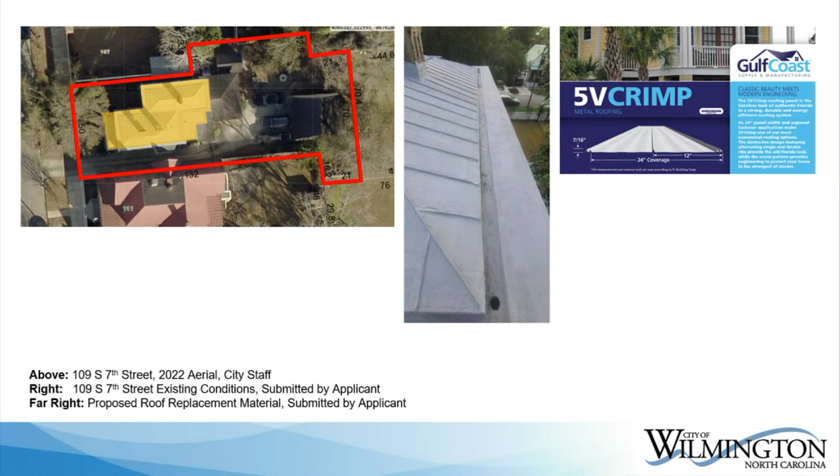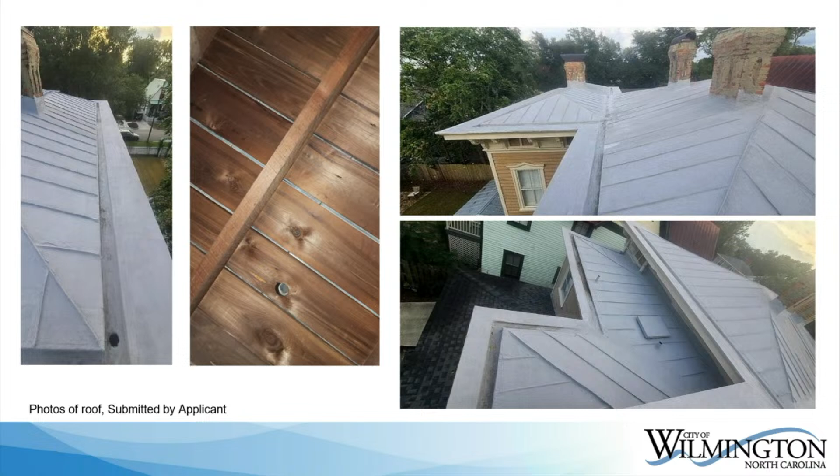The applicant provided additional information and photographic evidence per the commissioner's request after previous meetings, and these can be seen here. Staff would like to enter tonight's presentation and report into its proceedings.

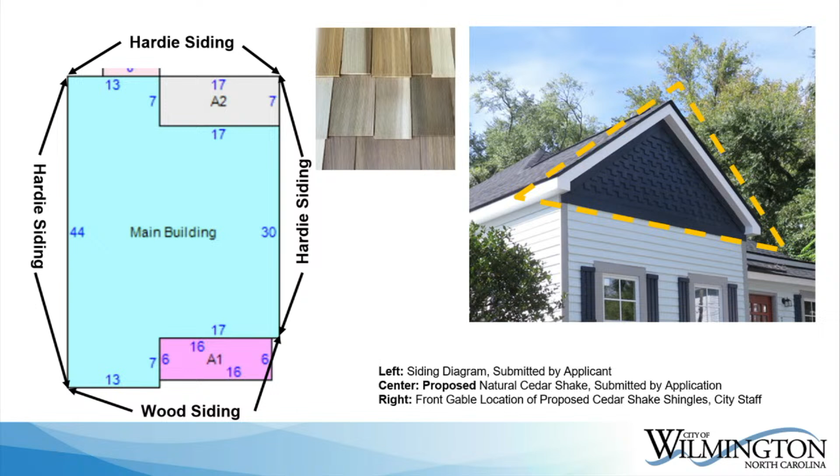Lastly, the applicant proposes to remove shingles from the front facade gable and install new cedar wood staggered butt shingles on the front facade gable end. The new shingles will not be painted or stained. The applicant also proposes to replace the front entry door and frame with Great Doors, knotty alder, unfinished, pre-hung single wood front door with a divided light and lower panel. Finally, the applicant proposes to repaint the house and front door with the colors shown here.

According to the National Park Service, installing vapor barriers like Tyvek would be considered an insensitive treatment of historic resources, and installation would require the removal of historic finishes that can be damaged in the process. Instead, they recommend that only if the walls are deteriorated or damaged to the point it requires complete replacement would it be appropriate to install a vapor barrier.

Staff notes that at the HPC meeting dated December 9th, 2021, the contractor and former owner of the home noted the current shingles on the gable and wood siding were revealed when vinyl siding was removed from the house. Staff also notes that the existing shutters were approved by a bypass application in 2022. The house is considered non-contributing to the district due to the lack of original integrity, as at the time of designation it was covered in vinyl siding.

Staff would like to enter tonight's report in its entirety to the proceedings. Are there any questions from the commission for staff?

Jessica, for some reason I'm pulling this item up on my iPad, and this agenda item keeps collapsing or disappearing, but I know enough about it having previewed this. Anyways, is there a proposal on this application for a new covering over the front door?

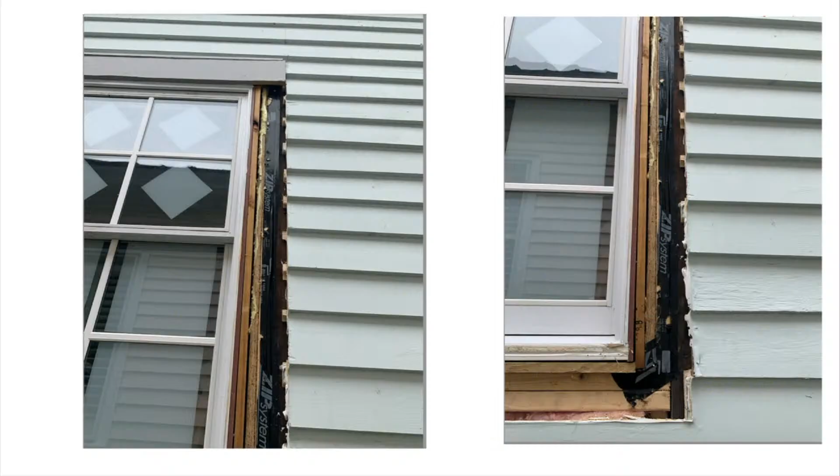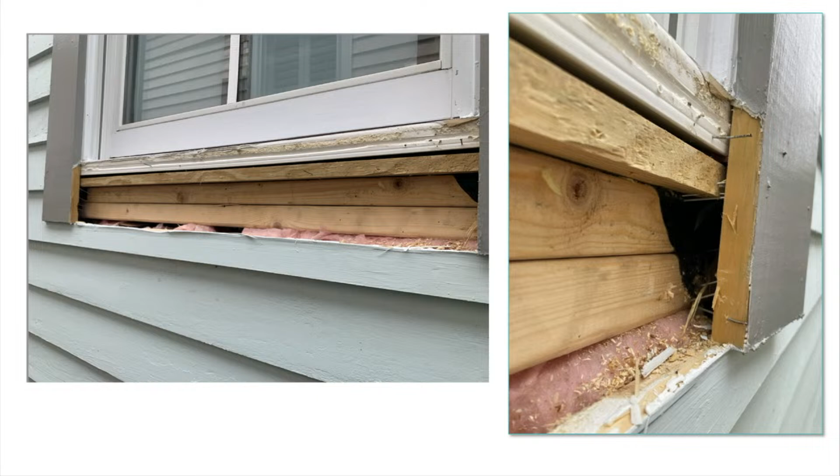Are you proposing a new construction window then? Yeah, unfortunately, just due to... do you have the picture of the one I sent you? Yeah, I've got them. Okay, see that when it was installed, it was about 2 to 3 inches in both directions smaller than the rough opening. So if we were to install a new window, we'd have to take out those shims. When you do a replacement window, you use the existing frame, and you're depending on the weatherproofing of the frame to the studs. That's not present here. And with those shims, we can't guarantee what their attachment is to the frames, so we wouldn't be able to guarantee the installation and achieve the DP value for the window.

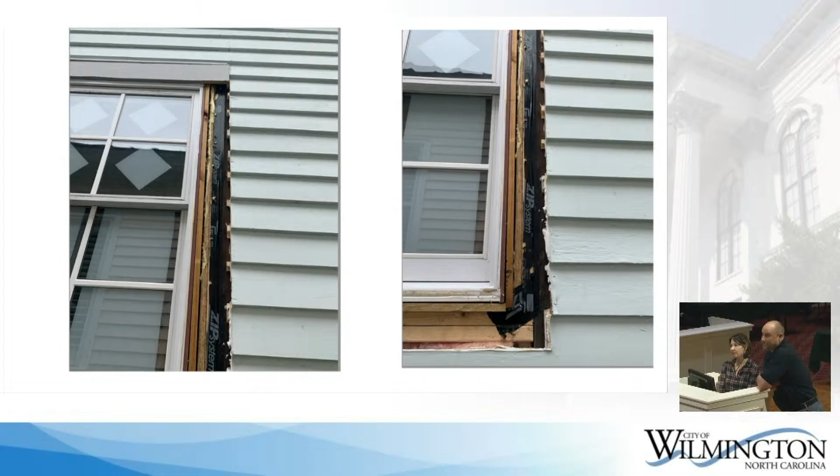Oh my gosh. Can you back up 2 photographs, please? So the shims, just so I can get myself oriented, on the photograph to the left, is that the shims that are at every lap in the siding? Maybe you haven't seen this. No, I've seen it in person. It's our exploratory surgery. We didn't want to tear everything off. So what the previous contractor did, there does appear to be some type of shim behind the existing siding, which looks like maybe they did that to bring it out to be more flush with the trim around the window. I'm not sure, but they did make some type of alteration to it.

After they removed that vinyl siding, I think it was keeping the water out for years and years. And when they took it off, there was more damage than they anticipated. I'm not sure what they did underneath it, but it looks like something was done to the siding. From what I understand, some was already removed and replaced.

We could switch PowerPoints, but if you look at the two pictures side by side of the home from before the owner sold it to me, you could see how much larger the windows were. There's a noticeable difference - probably at least 3 inches wider.

Well, when we asked that the wood windows be replaced, there was vinyl in between, so if you look at the picture - they did not put the right size wooden windows. They found the cheapest, fastest option, which is causing all of the mold problems - all of the problems - because they put in the wrong size wood windows and let you go with that.

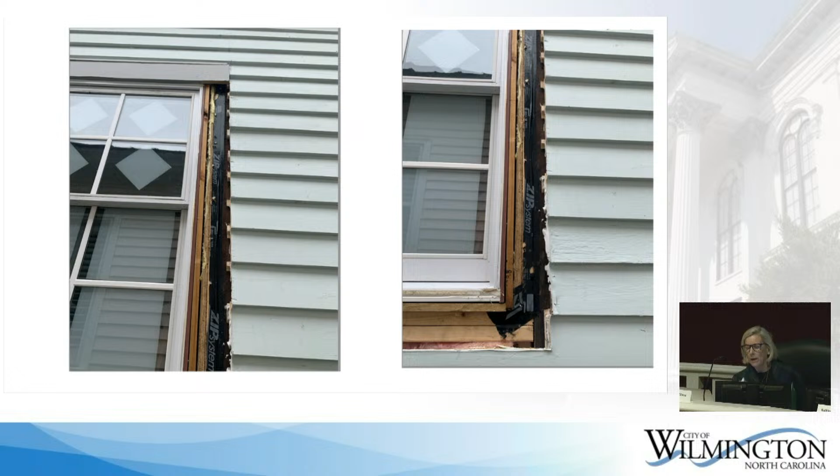And that's awful, and I'm sorry. That's a real estate deal gone bad. But they put this in there, and so now, Rudy, you gotta fix it - it messes up the heating and air and the mold and all of this.

And one of the advantages of doing this, Rudy, is a lot of the remediation can be done on the outside. Like you're saying, there's been a lot of air infiltration. I think Karina has reports of mold, and this will allow us to observe the wall cavities from the exterior and possibly treat it.

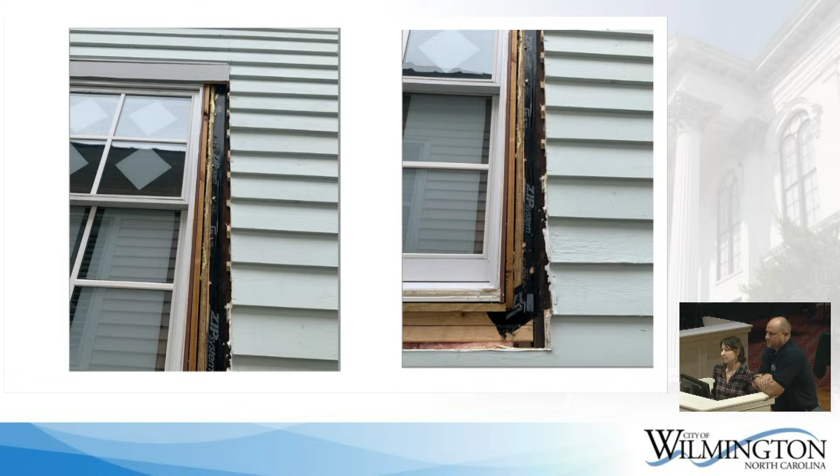I know that's not historical relevance - it's not, the Tyvek isn't the issue on an older home. It's the collateral damage done to remove the siding, remove all the trim features, put Tyvek over the sheathing. All new construction needs a water-resistant barrier, whether it's felt or Tyvek. But it's not that the Tyvek is the issue, it's just how to get that on there, how to deal with it, how to put it - all the damage is being done to take it off.

There's a lot of good siding on the house, and even the cedar that's being proposed to put back on is not gonna last as long as the siding that's already on the house as is. Now, those bottom pieces - I mentioned this a couple of months ago in that last meeting - you 100% have rot to repair. That has got to get done yesterday.

Again, the real issue though is securing my home so I don't have mold. But do you think that with fixing the window situation first - that has to be done first, and then we see what happens after that.

No, I would prefer, like I said, the 100% sure way, which is of course always the way I'd like to go, is to provide a surface to install the new windows to. So that would be the sheathing and the new vapor barrier, so we can continue the envelope throughout.

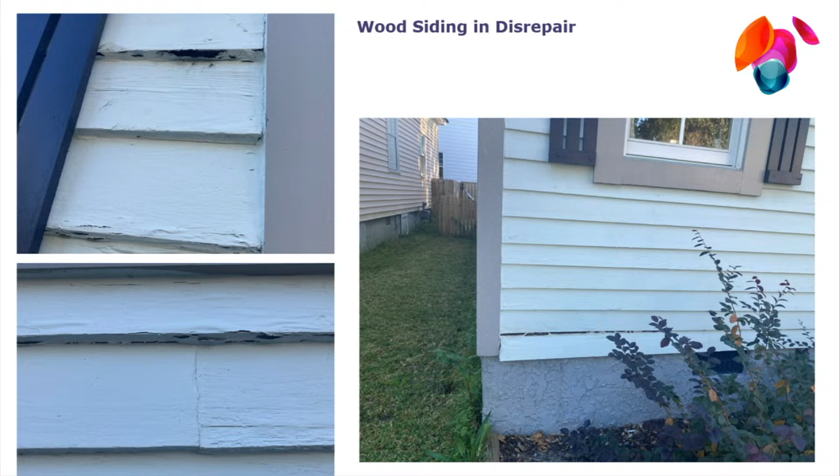So, like I said, it's to create a proper something to seal to is what we're looking for, so it would be a chicken and egg situation. And is there fiberglass insulation throughout the house?

Like there were some photographs? Yeah, fiberglass batts - bad insulation, yes. So it's not just where the windows were in those photographs, but the entire house has fiberglass insulation - well, we don't know what's in the walls. No, I'm pretty confident that from what we could see in the areas we took off, we could see pink fiberglass insulation, which is probably soaking up as much water as it can.

This was brought up a couple months ago too, the mold issue you're talking about. A huge candidate for that could be an oversized HVAC system, like if the house should have had 2.5 tons and it got 3.5 tons. After this, the HVAC whole entire system will be completely replaced, all of the tube things, the whole system, everything. From my understanding, it may be short cycling because it's too large for the house currently.

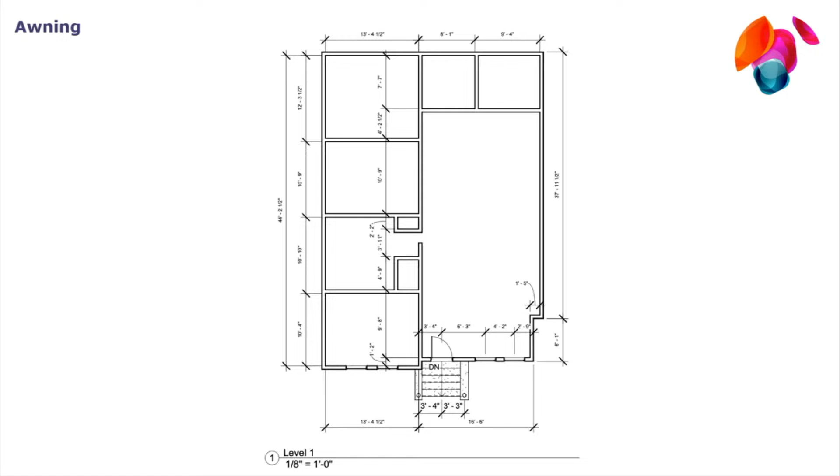I'm curious, is there a proposal for a little roof over the front door too? Yep, there is. So there's the door, and I'm proposing this awning - something that'll just nicely cover the front. The stairs will remain the same; we're not changing the brick stairs that have been there previously, in-kind wood. Well, those will probably not be in-kind, they'll have to be a little bit thicker. But the roof will be in kind with the roof we have today, elegant, simple.

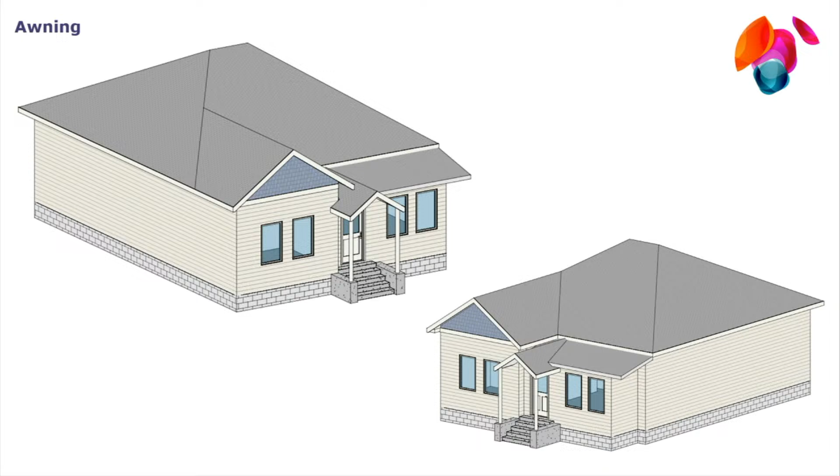I can show you other views. In the middle picture, right in the center of the house, is that a cricket we're looking at coming from the front face of the house, coming down to manage water that wants to fall down the plane of that gable toward the sidewall? Is that a cricket coming down? Are you talking about the hip that's coming down, dropping on the door? Which are you talking about? Yeah, right to the left, that triangle. Is that a hip? I think it's a valley that you have the overframe onto the main, and the valley dumps there. So when that water comes down where the cedar shake is, and comes down onto the new roof, what keeps the water from hitting the sidewall? I assume there's a cricket there, right?

I don't think she has a cricket drawn there, but you're right, it would need some type of cricket. That could be a cricket there that I'm looking at, but okay, I'm just curious about that.

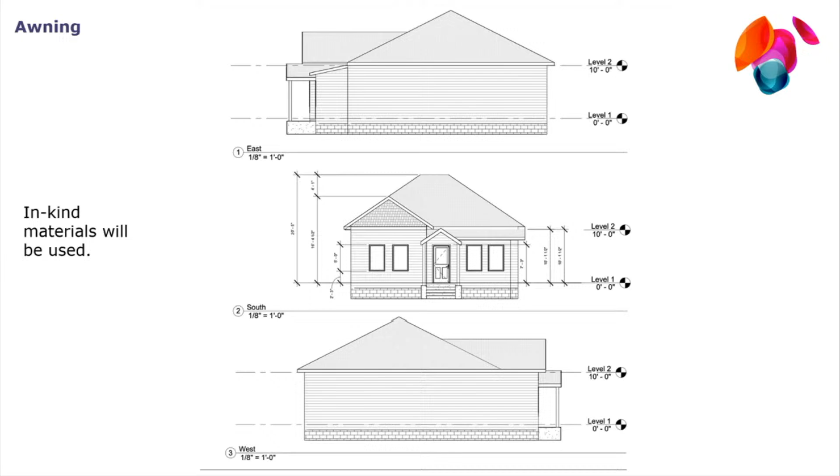So that's part of this proposal too - the window, the siding, and this feature right here, and also the shakes and the shutters. I just, they've been taken on and off about 5 times now, and they're falling apart. So same shutters, just going to paint them white to go with the new color scheme.

Staff would ask that we not vote on the awning piece that she's brought today. Staff has not reviewed it, and this is the first time we've seen it. I'm not comfortable with having something approved that we haven't even had a chance to properly review and let you know how it relates to standards. I think the other items are fine, but for me personally, that would make me feel more comfortable to understand all the parts before you guys approve that portion.

If we were to agree with that design in theory, is that something you would do at a bypass level, or would it need to come back? That is your call, but I would just prefer the opportunity to look at it and make sure I'm understanding what's going on before that. I'm not sure those images alone provide enough information. So if you wanted to set it up that way within the conditions, I think that's definitely an option. Yeah, that would be helpful.

And then the lighting I could do through bypass. You said the lighting? Yes, the lights - but when things are up, I could maybe decide differently. But are these the type of lights you would approve? Yes ma'am, but those are something we can discuss at a later date. We are here to talk about the siding and whether that is approvable, and I'd like to stay on that track.

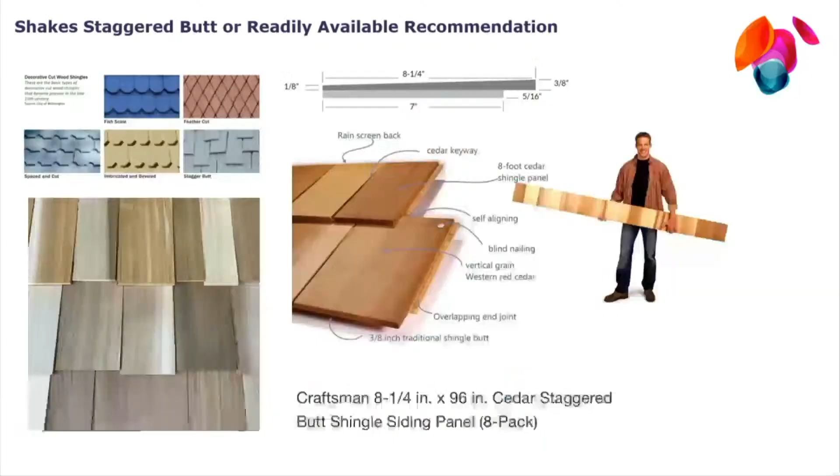Saying that the cedar shakes probably need to stay, because that's not insulating a heated space. And, as you can see, they use caulking absolutely everywhere on this house. I rewatched their HPC meeting, and they talked about caulking this - so that's all that's up there is caulking.

I just don't feel comfortable - they literally just caulked the holes from taking off the vinyl. I think one of the bigger factors is, there are certain builders that, if I follow after, I feel confident the field is closed and properly maintained. From what I've seen, I would think there are probably a million different Easter eggs out there that were not properly fixed. So it's our attempt to give her some reassurance that she's going to be in a safe home as far as mold and air penetration.

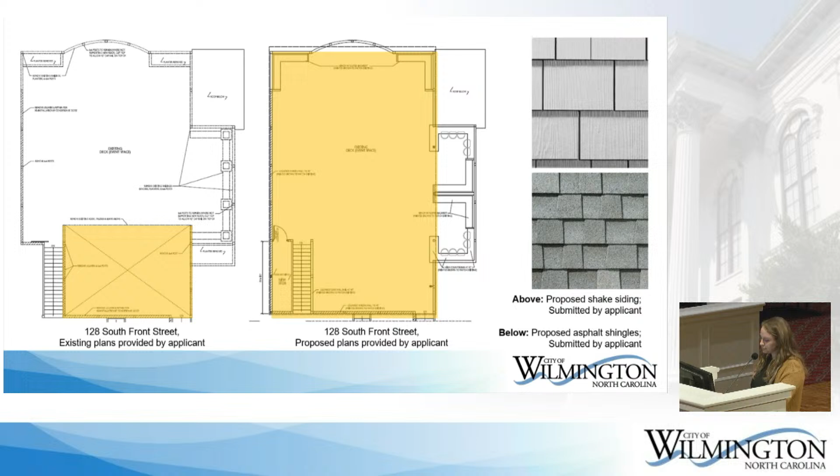The applicant also proposes to construct a storage closet approximately 15 feet 8.5 inches long by 3 feet wide in the southeast corner of the deck. The closet will be enclosed by proposed louver screens on the east and south sides, the existing staircase along its north side, and a single door entry facing west. The new door will be 3 feet wide by 6 feet 8 inches high and is to be constructed on site from treated wood.

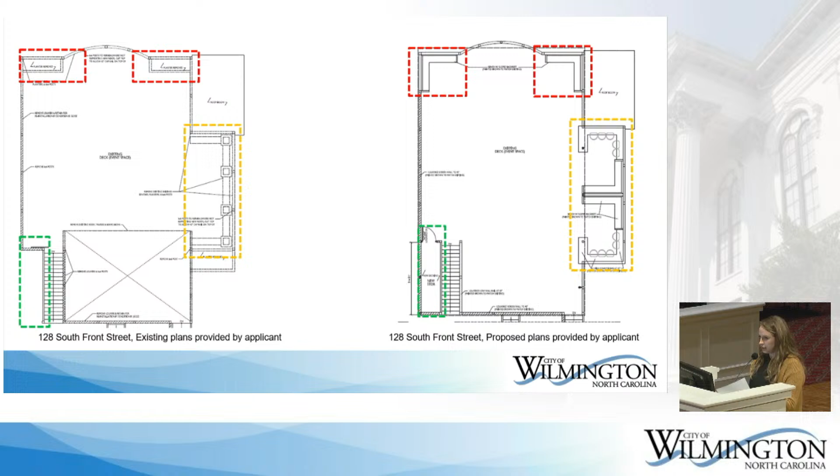The existing louver screen wall along the south side facade will be replaced by 93-inch high louver screens installed between the new roof posts. The applicant also proposes to repair and replace the existing deck balustrade as needed, and existing 6x6 posts will be cut for a 42-inch cap rail to be installed on top.

The proposed shake siding, framework, posts, benches, counters, louvered screens, and balustrade will be painted brown to match existing, and new trim will be painted white to match existing.

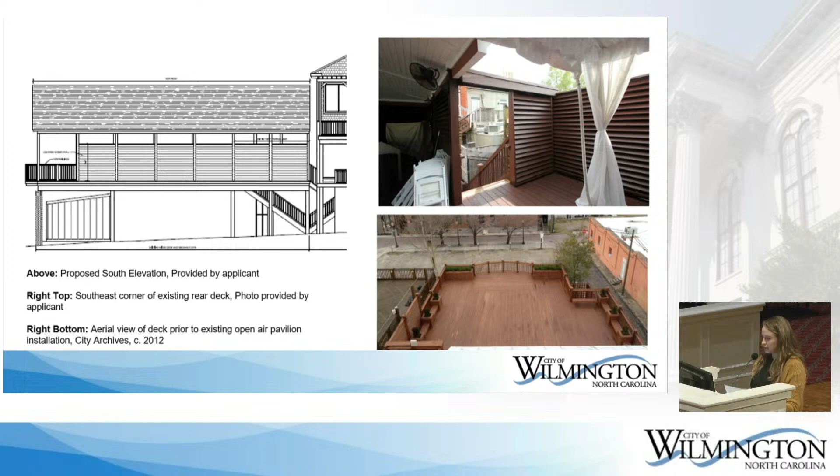Currently, the existing south side louvered panels have been infilled to be opaque without a COA. The proposed open-air pavilion would not be attached to the building, only the deck, and staff would like to note that the existing open-air pavilion has a standing seam metal roof.

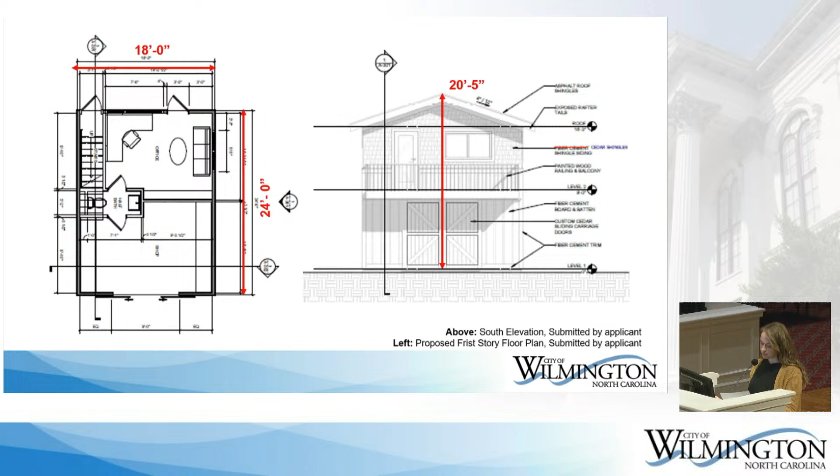The proposed setbacks would be 115 feet from the front facade, 5 feet for the side east facade, 20 feet for the side west facade, and 15 feet for the rear facade.

The proposed roof will be clad in Timberline HDZ algae-resistant laminated high-definition fiberglass asphalt shingles in the color weatherwood and will be supported by exposed rafters constructed from pine.

The proposed first story will be clad in James Hardie primed HC10 fiber cement smooth panel siding measuring 48 inches by 96 inches in the board and batten style, while the second story will be clad in stagger butt cedar shingles measuring approximately 16 inches by 3.5 inches.

The proposed shingles will match the size and design of the shingles on the main dwelling. The proposed trim will be James Hardie primed HC10 smooth fiber cement trim measuring 3.5 inches wide.

All proposed operable and fixed windows will be Andersen 100 series vinyl windows. All operable windows are to be sliding windows with either 1 or 2 operable panels. The window sizes have been included on the slides before you.

All proposed doors, unless otherwise noted, will be Therma-Tru exterior fiberglass entry doors with smooth star full light measuring approximately 37 inches by 81 inches.

The proposed south facade, first story, will have a single car garage door, and the proposed garage door will be a Clopay classic steel 18.4 R value insulated white garage door with insulated windows measuring 9 feet by 7 feet.

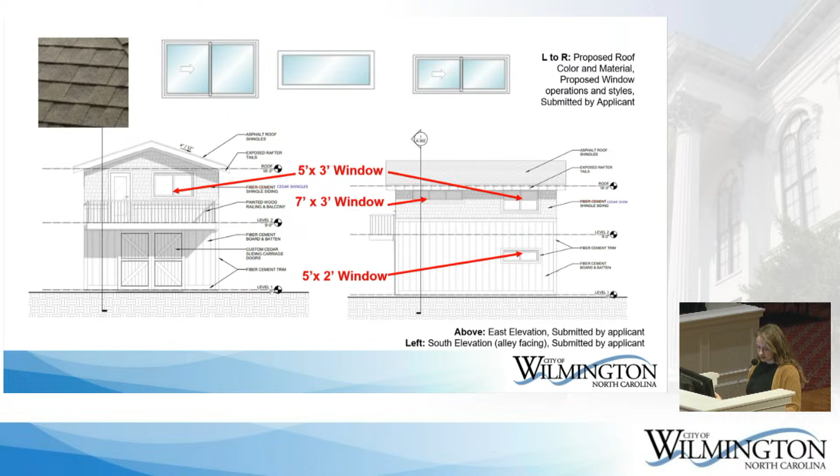The proposed side east first story, and the second story, I apologize, I put those notes twice.

The proposed front north facade will feature 2 doors and 1 window with 1 operable panel in the first story, while the second story will have 1 window with 2 operable panels.

The proposed side west facade features an exterior fiberglass entry door, smooth star 1 panel shaker, approximately 3 feet wide on the first story, and then the second story will have 3 fixed windows.

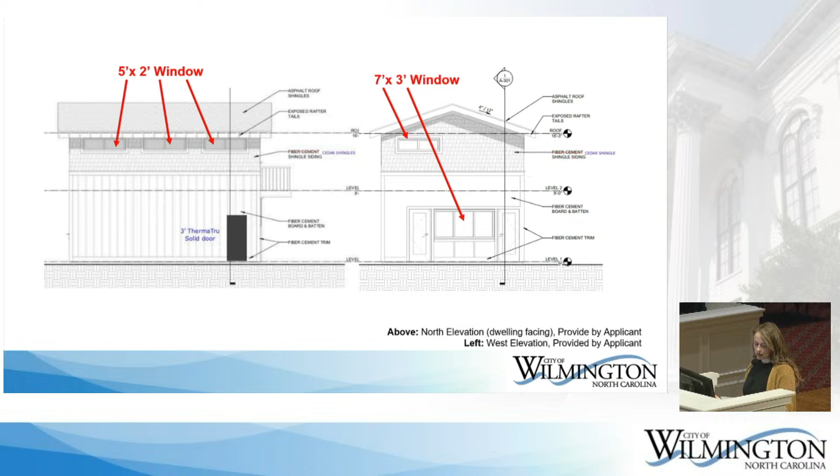The proposed accessory structure will be partially visible from North 20th and Chestnut Streets. Many of the properties on the block have accessory structures along the alley and are partially visible from North 20th Street, including the neighboring house to the east, which has a 2-story accessory building.

The dwelling is 1.5 stories tall, and the height of the house as measured from grade to the peak of the roof is not provided. The proposed accessory building would be 2 stories and 20 feet 5 inches tall from the average grade to the peak of the roof.

The City of Wilmington Land Development Code prohibits accessory structures from being taller than the principal building on the lot. Under the previous COA, MJW 2228, HPC approved with the condition that the new accessory building shall be no taller than the house as measured from the average grade to the peak of the roof.

They also approved that new windows and doors were to be Fibrex, a composite material blend of 40% wood fiber and 60% thermoplastic polymer, some of which is a reclaimed material. Staff would like to enter this presentation report into tonight's proceedings at this time.

Are there any questions for staff? So I remember that we approved demolition of the accessory structure a couple of years ago, right? Yes. And wasn't there also a proposal that we reviewed for a new structure? Yes. It went past the deadline to start work. Okay, and that's the one they were proposing for Fibrex windows? Yeah, so they did make some changes. Okay, and the window material is one of the changes they did make.